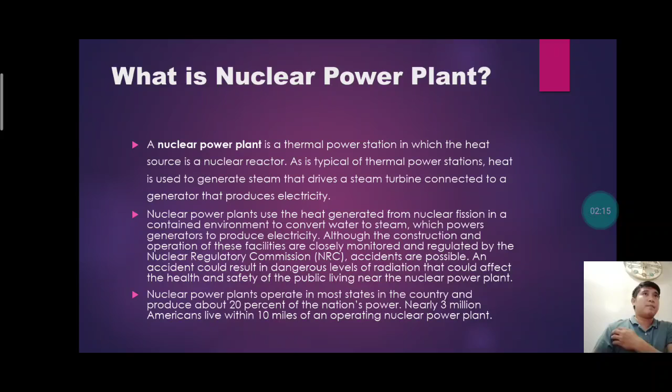This video is focused on the details of how a pressurized water nuclear reactor works. Nuclear power plants are advanced versions of conventional coal power plants. When a furnace in a coal power plant is replaced by a nuclear reactor, it becomes a nuclear power plant. Since a nuclear reactor is a controlled nuclear heat generator, aka a nuclear bomb, it requires a higher standard of safety. While a coal power plant uses 2 water cycles, one for the steam cycle and the second for the cooling cycle, the nuclear power plant uses 3.

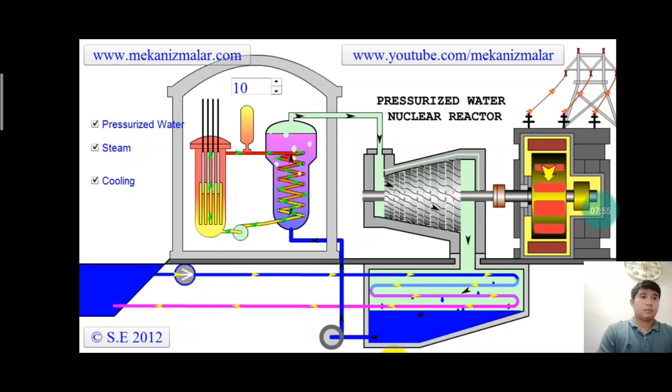Please join us next time, and don't forget to subscribe.

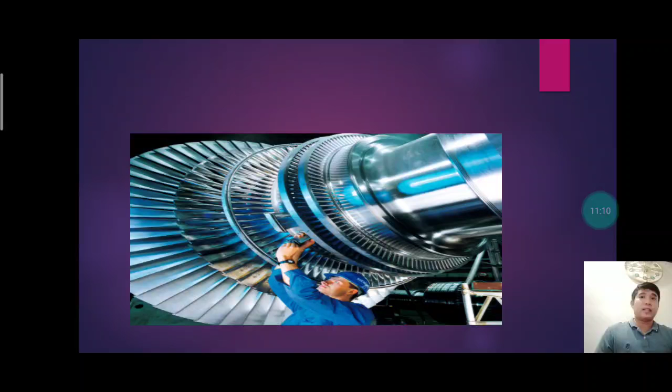Now I will discuss again the factors governing the selection of a site for the nuclear power plant. Number 1, availability of water — sufficient supply of neutral water for generating steam and cooling purposes in a nuclear power station.

Number 2, disposal of waste. The waste of a nuclear power station is radioactive and may cause severe health hazards. Because of this, special care must be taken during disposal of nuclear power plant waste. The waste must be buried sufficiently deep from earth level, or disposed of in the sea, far from the seashore. So for number 2, disposal of waste, it can become a serious health danger.

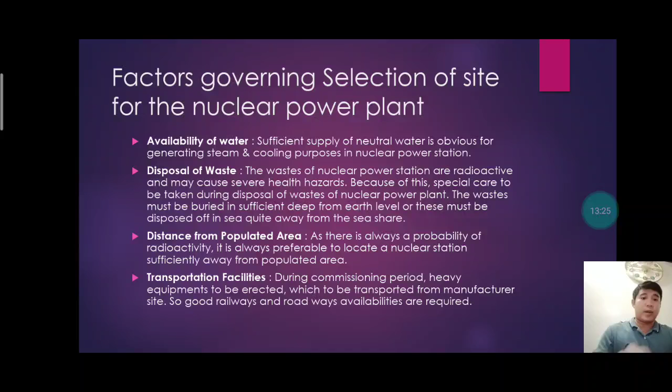Number 5, skilled person requirement. Availability of skilled manpower is needed to run and handle the plant, and good public transport should always be present at the site to support the specialists working there.

Near to load center: since generating stations are far from thickly populated areas, to reduce transmission and distribution losses, the plant should be located near the load center.

Geographical condition. Radioactive material is very dangerous to human health and all living organisms. If, due to an earthquake, there is a chance the reactors could blast, to avoid this, the area should be free from earthquakes.

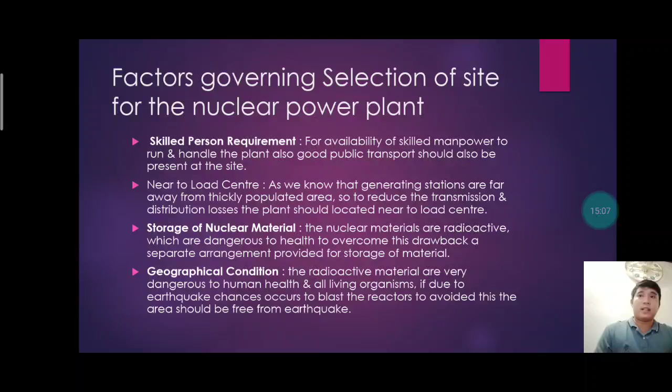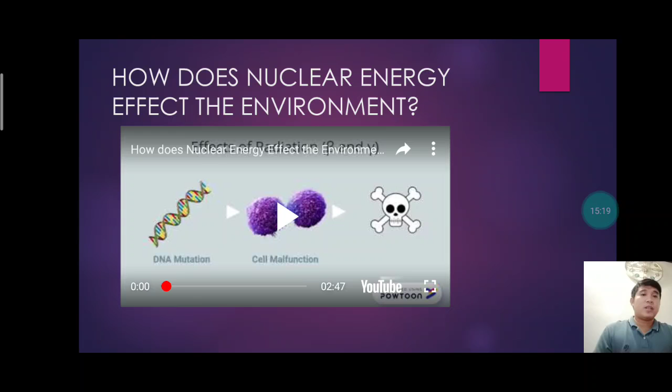Now I have a short video about how nuclear energy affects the environment — by Soham Bose, Simon Park, and Aaron Yee.

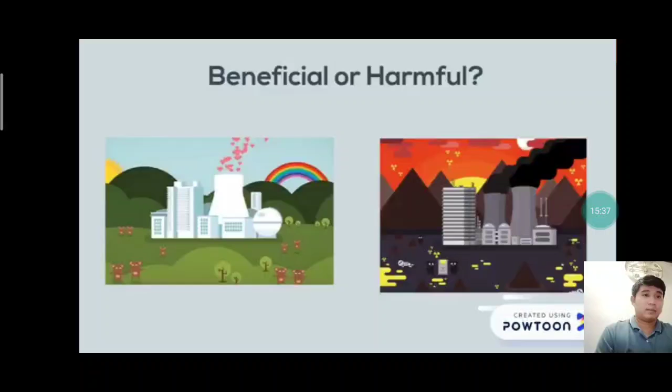The advent of nuclear energy has been part of a polarizing discussion between efficiency and environmental harm. What elements are used to produce nuclear energy?

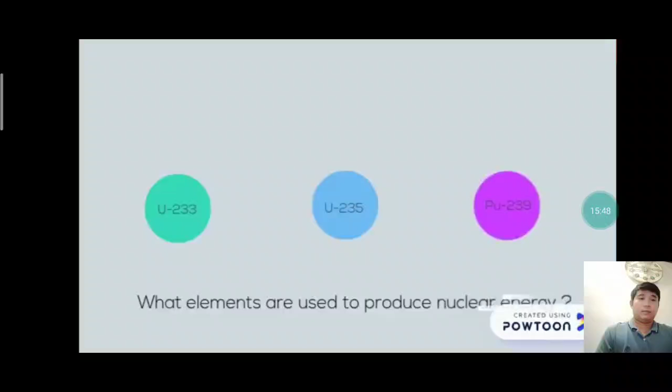Uranium-233, uranium-235, and plutonium-239 are used because they have large nuclei and are easy to split. These elements are found in the earth in minute quantities and are formed into pellets, which can then be put into large fuel assemblies in the reactor.

The cooling towers use the heat created by fission reactions to turn water into water vapor, which is then used to turn turbines, generating electricity. The gases coming out of the top of the nuclear reactor are actually water vapor, which isn't harmful to the environment at all.

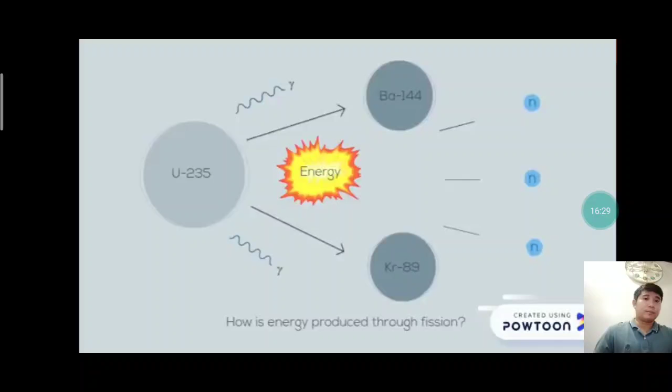Inside the reactor, fission reactions occur where uranium-235 is bombarded with neutrons to form gamma rays, thermal energy, products such as barium-144 and krypton-89, and more neutrons to continue the chain reaction.

The energy produced by uranium as a fuel is much more efficient than other forms of fuel, such as oil or coal. One gram of uranium is equivalent to 120 gallons of oil and 1 ton of coal.

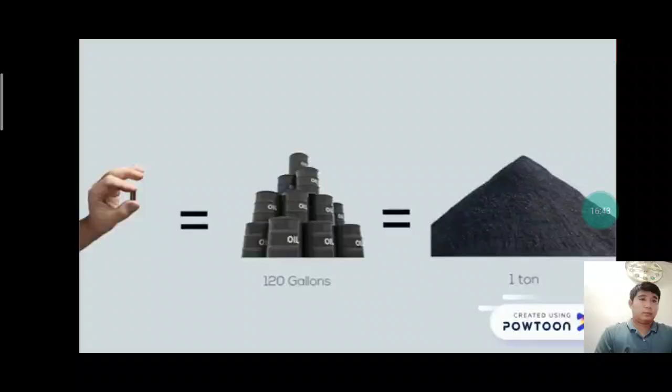Barium-144 is a radioactive element which beta decays to lanthanum-144, and eventually to neodymium-144, which is stable.

DNA mutation, cell malfunction, and consequences such as cancer or even death can be caused by beta and gamma particles released by these reactions that lodge into biological systems in the body, ionizing molecules and creating free radicals.

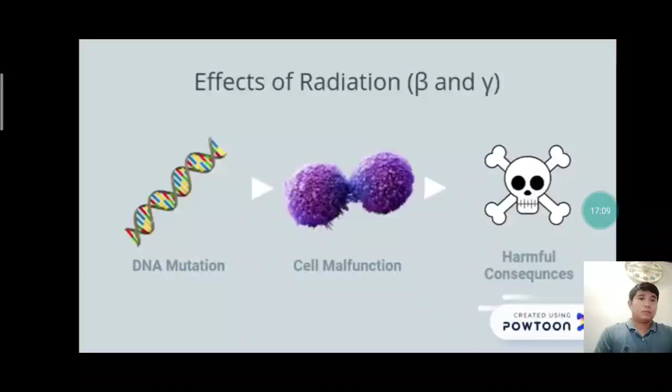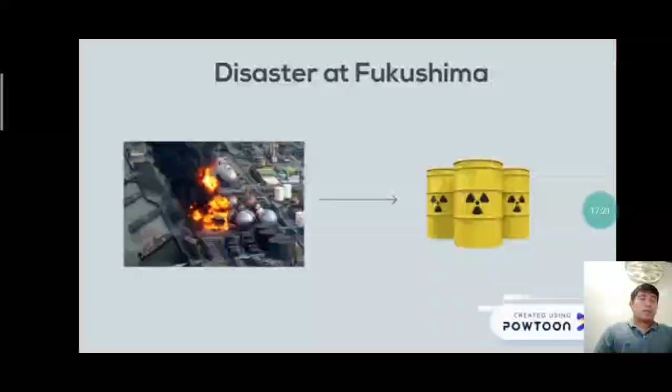The ingestion of beta and gamma particles by way of a liquid is one of the primary ways it can get into the body. After the Fukushima meltdown, radioactive waste spread into the water, jeopardizing the lives of marine and terrestrial life in the area.

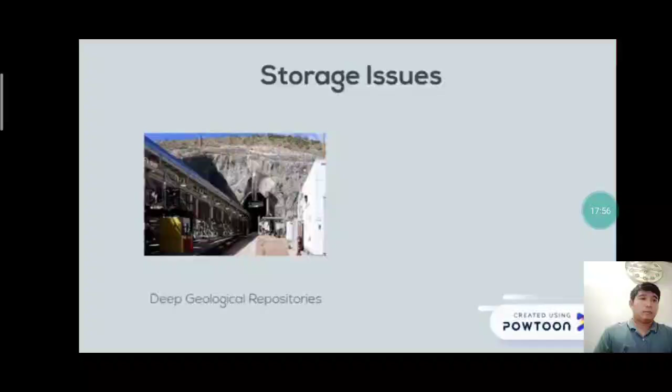Even if nuclear energy is further adopted, there are problems of nuclear waste storage and the idea of reprocessing some of the waste in other reactors. Nuclear waste must be stored in deep geological repositories to avoid damage to the environment by radiation, as well as deter theft by terrorist organizations. Also, if reprocessing is applied, it allows for a bigger reservoir of materials available to create nuclear weapons.

Thank you for watching.

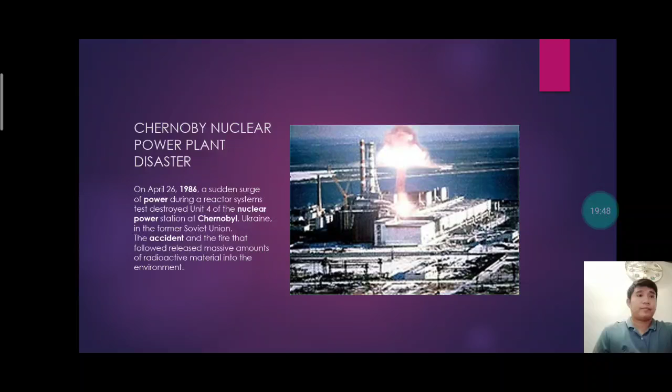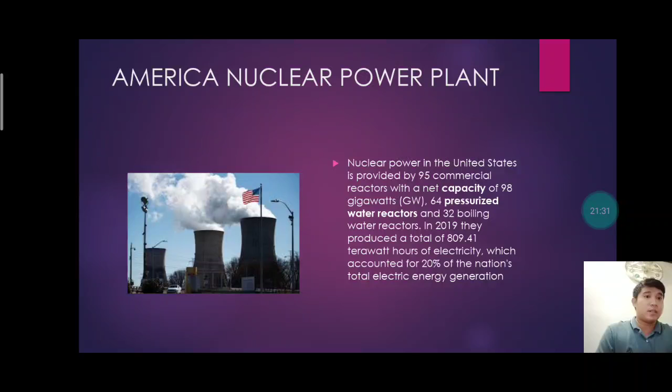Nuclear power in the United States is provided by 95 commercial reactors with a net capacity of 98 gigawatts, 64 pressurized water reactors, and 32 boiling water reactors. In 2019, they produced a total of 809.41 terawatt-hours of electricity, which accounted for 20% of the nation's total electric energy generation.

This is the France Nuclear Power Plant. The nuclear power plant of France is the largest source of electricity in France, with a generation of 379.5 terawatt-hours, or 70.6% of the country's total electricity production, the highest percentage in the world.

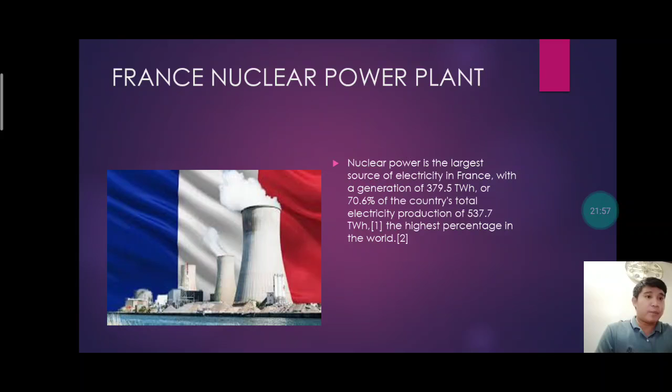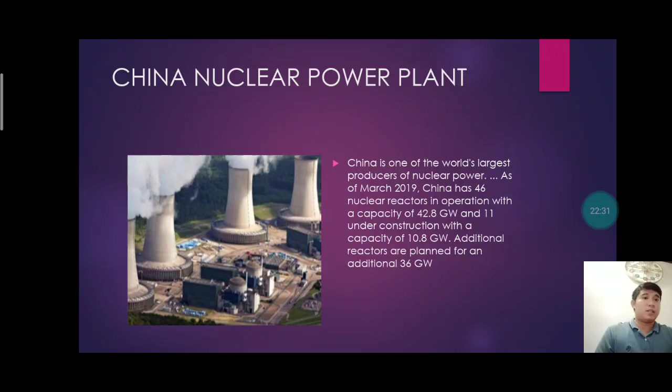This is the China Nuclear Power Plant. China is one of the world's largest producers of nuclear power. As of March 2019, China has 46 nuclear reactors in operation with a capacity of 42.8 gigawatts and 11 under construction with a capacity of 10.8 gigawatts. Additional reactors are planned for an additional 36 gigawatts.